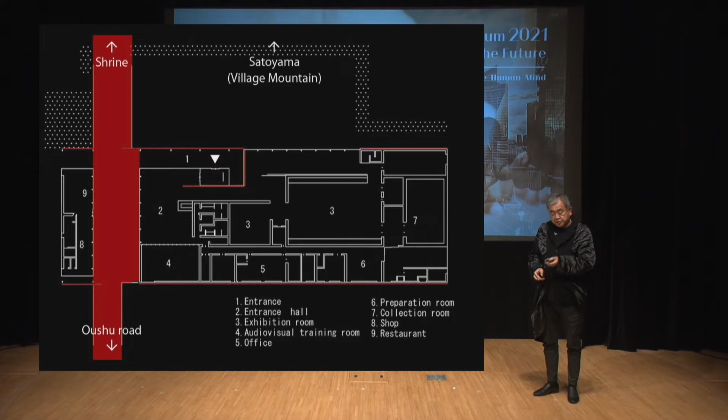But I wanted to use local energy and local material as much as possible for this project. The planning of the building symbolizes the relationship with Satoyama in the 21st century. We cut the building to create the connection to Satoyama, and people can feel nature of Satoyama in the building. This is also very important.

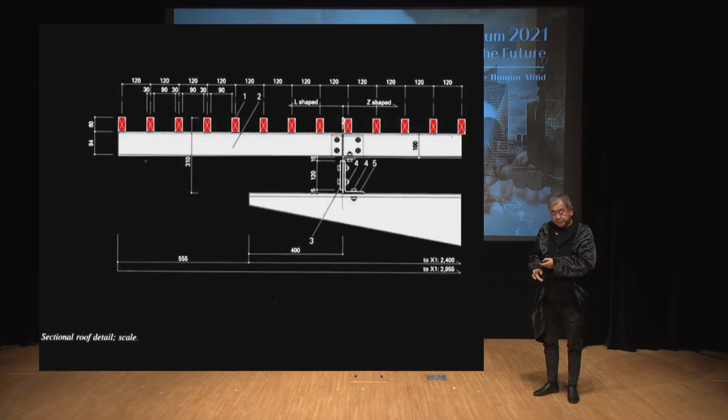Most of the material came from Satoyama, and long eaves were very important to bring natural wind to the building. For the interior, we used rice paper from the village, stone from the village, and of course wood from the village. And for realizing that project, contemporary science and contemporary technology were needed.

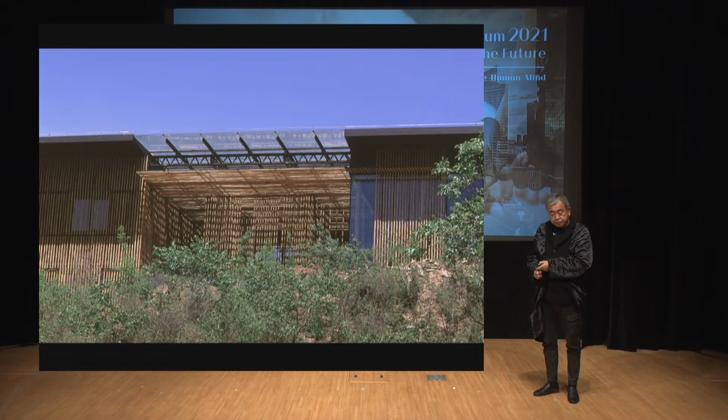And in China, just beside the Great Wall, we designed this bamboo house. Bamboo used to be a very important material for life in China, but it was already forgotten. In this project, I tried to use local bamboo as much as possible, and also used bamboo for the structure of the building. It is very symbolic, the tea room in the house.

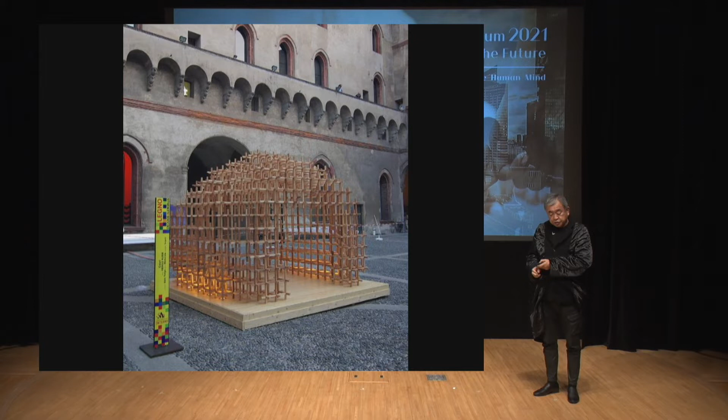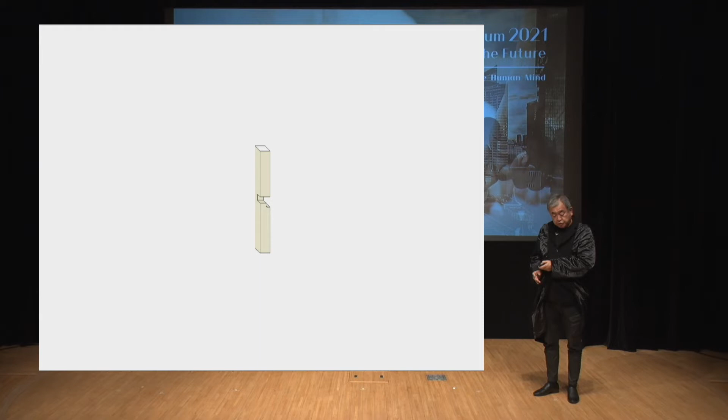In Europe, people are also very much interested in using natural material. This small pavilion, we worked with students of Tokyo University to test a new structural system. The hint came from a very old toy in the mountains. The joinery system is very unique. People didn't use metal, didn't use glue for this structural system, just cut the joint to fix those small elements.

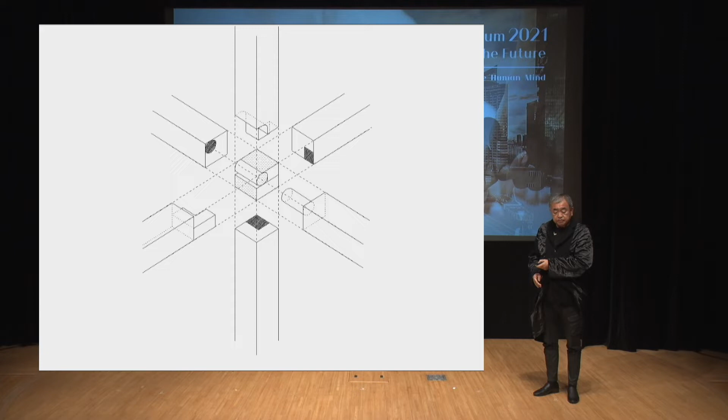The students could learn how to assemble those small elements. Also, computer simulation of the structure was needed to create this transparent structure system.

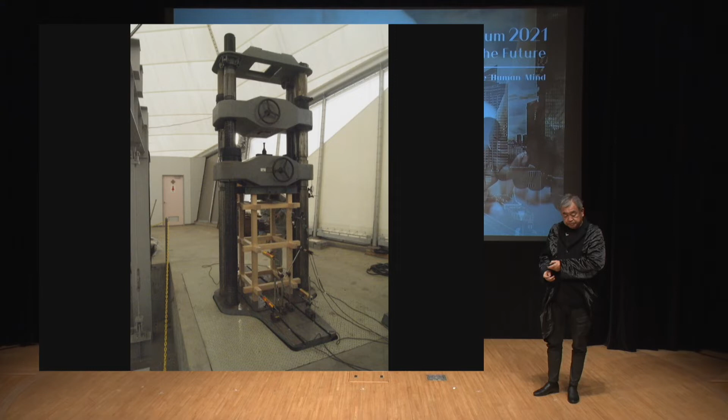After this small pavilion in Milan, we tried to make a real size building using a similar system, testing the material and a new structure system. It's a 3-story, 10-meter high building, but no columns—just small sticks. The dimension is just 60 millimeters by 60 millimeters supporting the building. New science and new technology was used to achieve this building.

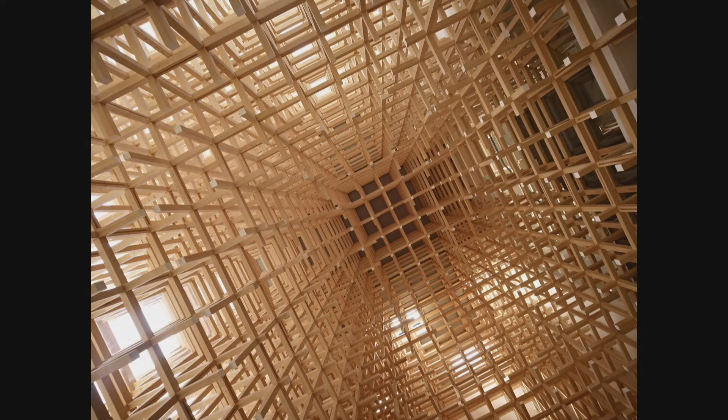And as for the bigger structure system, we also try to use wood. This is a wooden bridge. Wooden bridges were very normal before the 19th century, but in the 20th century, most big structures were built with concrete and steel. I tried to go back to wooden structure and use local wood as much as possible. Of course, structural calculation is needed to achieve this long span building.

And also I tried this material. Thatch used to be a very important material for the roofs of Japanese buildings, but in the 20th century it was totally forgotten. For this new building, we did use thatch for the facade. Thatch is a really beautiful material, and function-wise it's also a very good insulation material. But the most difficult point of this project was finding the craftsman who could use thatch for this unique facade.

And I want to talk about the National Stadium. We designed the National Stadium for the Tokyo Olympics as a symbol of a new era. The 1964 Olympics was the first Tokyo Olympics, and at that time Professor Kenzo Tange of Tokyo University designed a beautiful concrete monument. That concrete monument symbolizes the era of economic expansion and industrialization.

But for the 2021 Olympics, we thought we should try a new approach. We tried to use wood as much as possible for this building. And also, we needed to use concrete, but most of the structure was precast concrete. Precast concrete is very useful to reduce CO2 in the air.

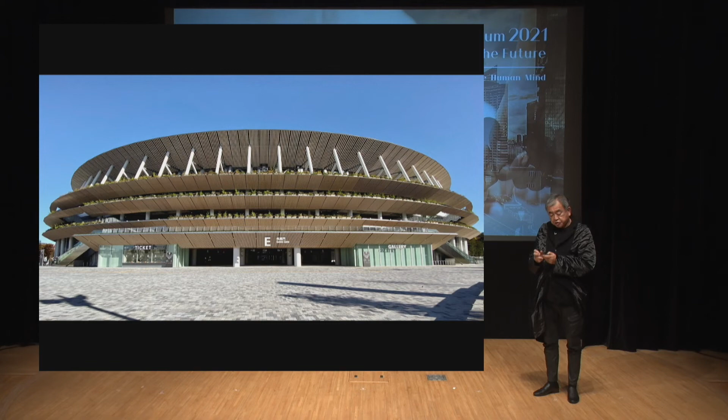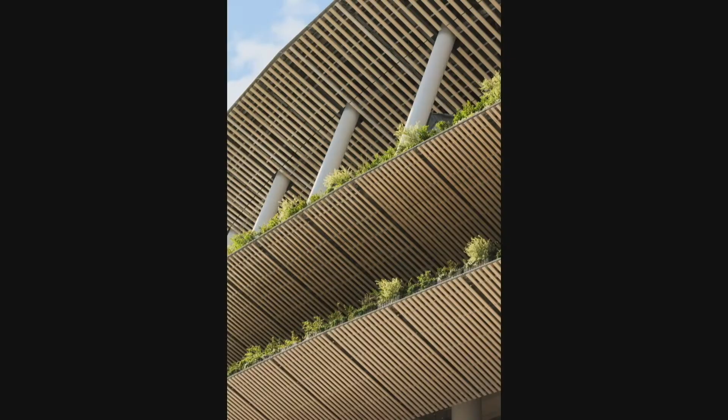For our National Stadium, we tested and did a simulation of natural wind in this unique section. The series of wooden louvers create the soffit, and the pitch of the louvers was decided by the natural wind simulation. We checked the big data of the place, of the site, and in summer we can have south wind. To bring that south wind in as much as possible, we designed the unique section, angle, and pitch of the louvers. Computer simulation is very helpful to create comfortable air conditioning for the place.

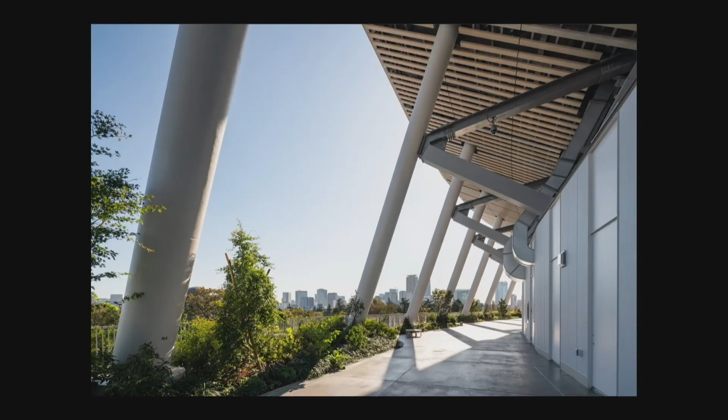In the 20th century, air conditioning was the common way to control temperature and humidity. But for this building, we found another solution: to use natural wind, testing the local wind, to control the climate in the stadium.

In the stadium, we tried to create a special effect of natural light. The forest was the model for the interior space - in a forest, we can feel the beauty of shadows beneath the leaves of trees. We tried to create a similar environment through the unique detail of the roof, the wooden structure system, and the new type of photovoltaic panels on the roof.

And for the seats of the spectators, we found this solution. Normal stadiums have one color, blue or red, but we used 5 mosaic colors for the seats, and it looks very natural. As you know, we couldn't have spectators or visitors to the stadium, but people felt like many people were watching the game because of this mosaic pattern, which was designed by computer.